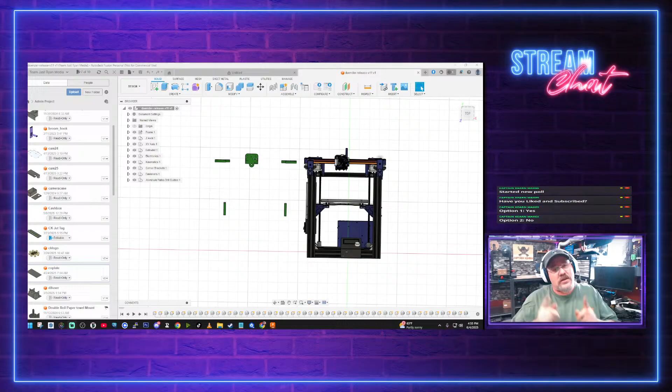Yeah. Oh, Superman does not look like Kevin Reeves.

Anyhow, let's show you guys the progress that we've made so far. I got to do this manually. I need 3030 extrusions. I need everything, bro.

Ta-da! Yeah, we have a new camera, not new camera, we have rearranged the cameras. So we have a better overhead view as well as a view towards me.

Click that. Oh, are you kidding me? Back. Dismiss the poll. How you doing, Havoc?

Zenny's18, I've been doing a lot of stretching today. I don't think I need to do anymore, but I appreciate the sentiment there.

But yeah, we are back with this beauty right here, the Ender Duo. This is made out of 2 Ender 3s. Actually, yeah, they're not even Ender 3 Pros. They're just Ender 3s. And we're going to be doing cleanup on it a little bit later because it's gotten awfully dusty.

But tonight we're going to be working on the Z-axis as well as the Y-axis and the X-axis. Now, there was something that I noticed with this.

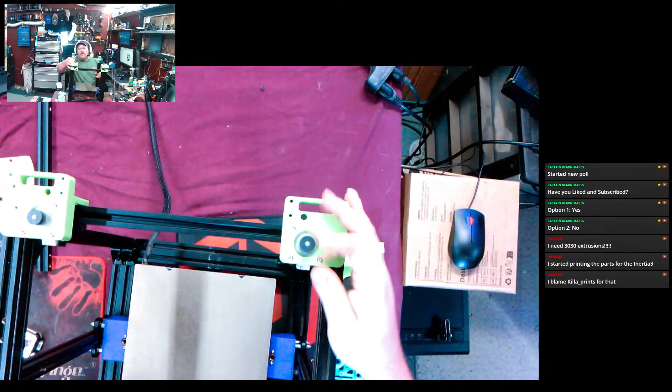You blame Killa for that? I blame Killa for everything anymore. The guy's got more money than sense. No, just kidding. He's a great guy.

He's a great guy. But so we have these 2 top motors on here. I went ahead and put these on the other day. And then I went ahead and put the rails in. I have not leveled a thing. Nothing is square on this thing yet.

So we're going to be doing all of that after it's put together. That is what I have been told to do, to save it till last. And I'm like, okay, because parts need to come on and off of this to make sure everything is kosher.

So what we're going to do is we're going to flip this puppy on its backside and shove the motor right up through the bung.

You know, especially the way Killa does things, everything tends to get expensive. But I noticed something on this particular piece the other day, and I will show you guys what I mean. So we're going to leave that right about there, and we're going to put this one in as well.

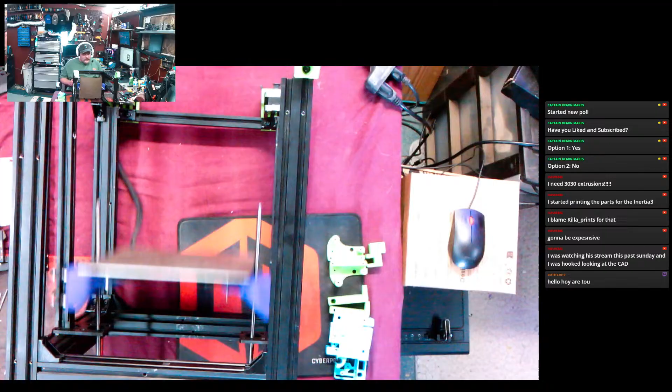All right, so I noticed something, and I didn't catch this in the initial setup of everything. Tip this back up top. You guys notice anything? Notice where the Z-axis is. I know, I got hooked on the inertia too, but I can't do it, I don't have that kind of money right now. But tell me what you guys see. Mind you, the Ender is normally a 220 build plate. Normally a 220 build. What can you guys guess from this particular setup?

I'm just waiting to see if anybody catches it because this is absolutely nutty. Havoc, you got a clue? You know what I'm talking about? All right, I'm going to set this right here where it's going to be, for the most part. Now tell me if you see what I see.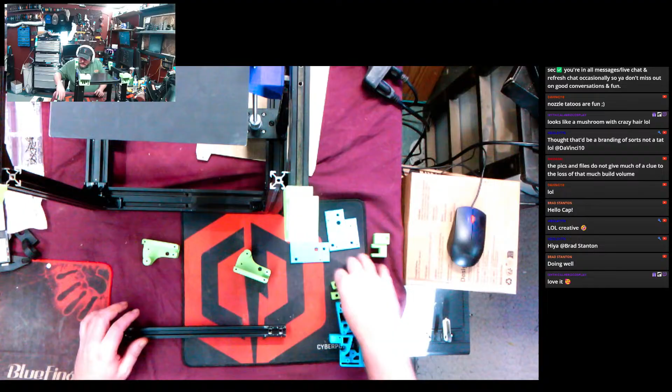All that stuff, it is what it is. But back to the project here. So let's move this guy out of the way for a moment. All right, so we're talking about the actual movement system on this now, because that's where we're sitting. Believe it or not, people, there's not a lot to building these printers. I've been trying to space it out. The longest part is going to be the electronics for the most part, wiring, getting all that set up.

So let's go to this screen, and let's go look at the top. And you guys notice these are all drill guides right here, and I already have that. These are things that you can use. These are drill guides for if you actually don't print the parts, you make it out of aluminum, which I do want to do. I just don't have a CNC to do it. I do know a couple of creators that do.

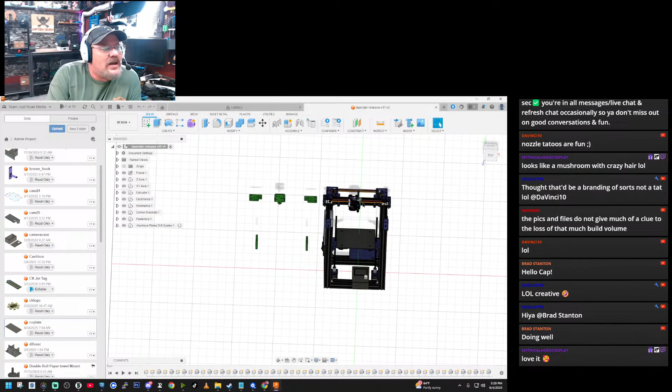Okay, so we're going to have to create spacers because I don't have any of these.

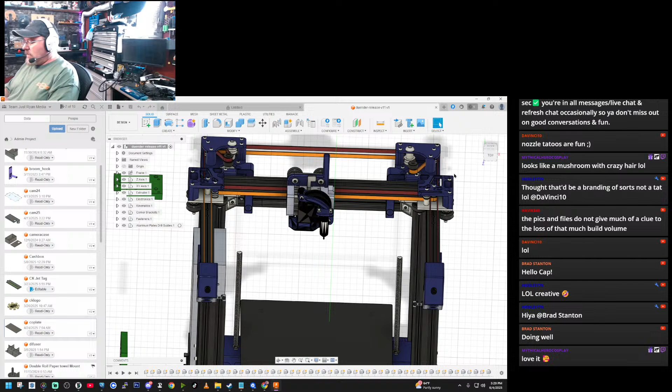But if we go into the back here, the kinematic system, whatever you want to call it, these sit - let's see, oh, they're on the outside? Yeah, on the outside, these sit like this. And you guys can't see that in the camera whatsoever because I don't have that camera up. So let's move it up here again. All right, so these pieces sit right up here, just like that, for the belt guards and so forth.

Okay, and the pulleys and the bushings and yada yada yada. Oh, that's interesting. So one of these, I do need to either smash down or just take off, which I have a brand new set. Oh well, you can't even see those because of camera. No, no, no, we got a brand new set of pulleys, so I am not concerned about that.

So we need to use 4 more guide wheels on these plates. No, 3 more. 3 more? Yeah, 3 more. Two on the outside, one on the inside, right? I'm pretty sure that's how it works. Yep. And the adjustables are on the inside.

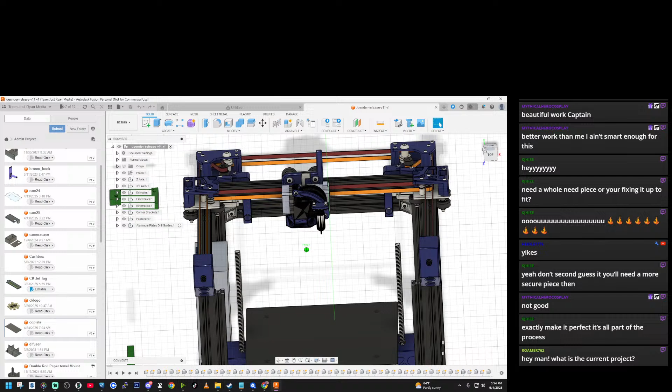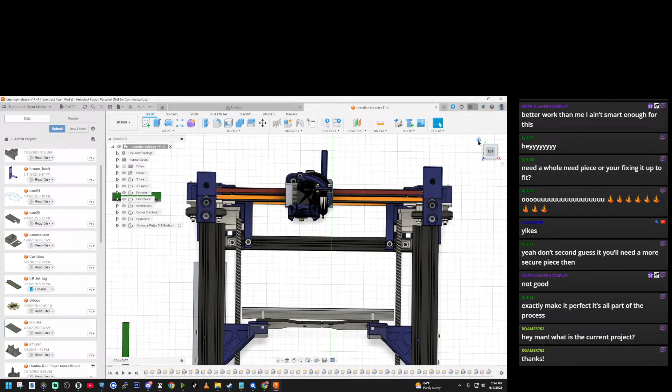So we are building this particular printer, the Do Ender project. It is a project made out of two Ender 3s to recycle and reuse as much of the machines as possible. Now my buddy Havoc over there, he says, well, you should have just built an Ender NG. He's probably right. However, this is for funsies. So we're going to build one and see what we can get out of it.

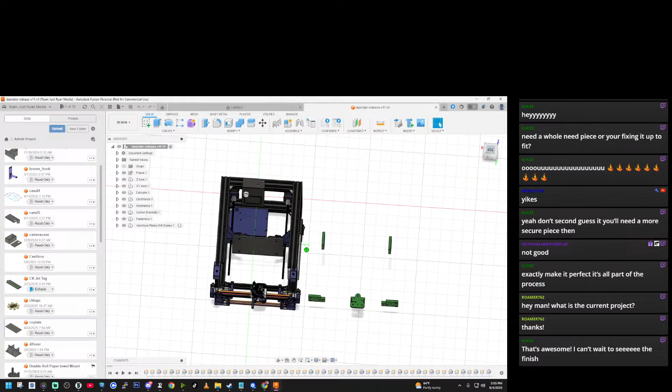So this is, you know, this is the full project here. I've already made some alterations, so it's not quite the same as you would think of it. But yeah, there's a purpose why the inventor of this project actually created drill guides, because he says this piece right here...

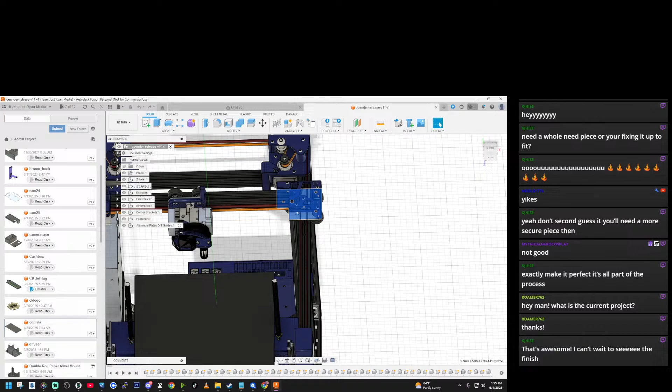Let's see, yeah, this piece right here and the back plane for the extruder, back there where the wheels are on. Anything with wheels on it, basically, and that, they all need to be aluminum. Now even he says that on the sides here, this plate that is behind the Z-axis should be aluminum as well.

But we're going to redesign this altogether, because if you guys look at the existing project, what we've got going on here, let's move this over a bit so you guys can judge for yourselves how much. You see where the lead screws are for the Z-axis, right here and right here.

If you put a hot end on that, stack it up here, how much build space do I lose because you can't hit those lead screws? Your build size stops at those lead screws. So I lose 15 to 20 on this side and 15 to 20 on this side. So I lose, just say 40 to 50 millimeters off of a bed size that's 220, or it's 235, 220 actually printable. So that brings it down to a 180. Now this is a 120 plate, I don't have a 180 plate, but you guys get what I'm saying, right? You kind of get gypped.

No, I did not. Here, I'll show you what a maker coin is, in case you don't know. We'll do Zany Maker Zach's coin. That is a maker coin. We give these out to each other and to people at events such as Rocky Mountain RepRap Festival, and they're multicolored, multi-dimensional. You know, they have a QR code on the back or a tag in it, an RF tag to where you can read company information, what have you.

I'll be honest, that is the most complex thing I have ever had to design and print because they're a pain in the butt. And I've printed a 3.5 foot starship, and I think that the maker coins are actually harder to print.

There are a number of printing projects that I have coming up, but I haven't got to those just yet. There's a lot of things that I want to do, but in order to do that, I want to do some of these things first.

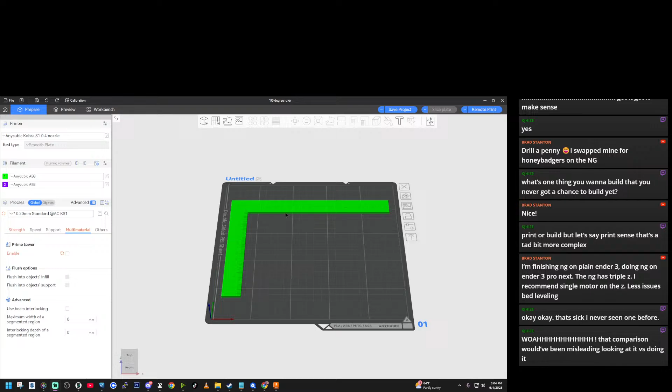Comparison would have been misleading. Look at it versus doing it. So here, let me show you. Let's go to this screen here. This is a ruler that I quickly designed, a 90-degree metric ruler, earlier today.

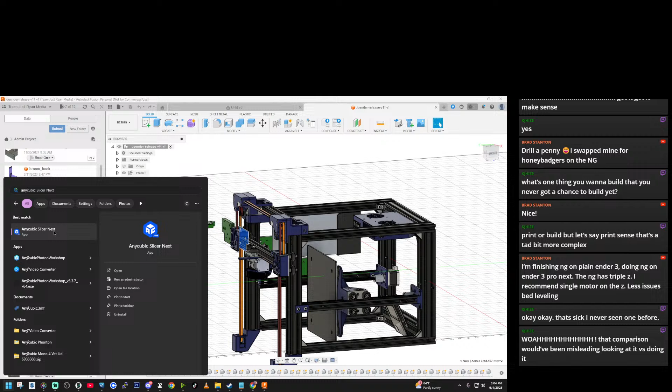Oh no, okay, so that doesn't want to work properly. Let's just discard the changes for that and reopen the software, I suppose. For some reason the software is taking forever to load, and I don't know why. I just don't understand it.

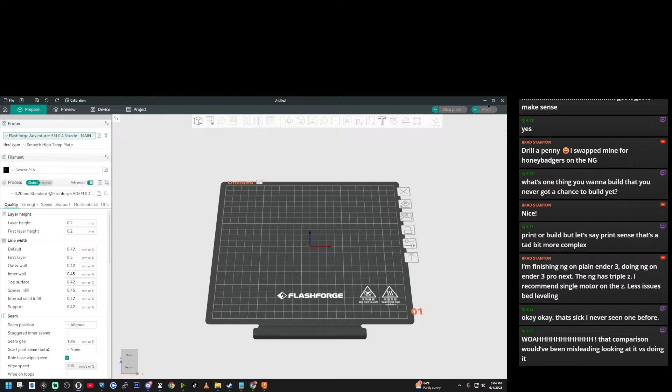This is regular Orca Slicer, and I don't have it set up for the Anycubic Kobra yet, so that won't work to show you guys the coin. But...

Oh yes, this is absolutely Legos. I mean, you know, this is my wheelhouse sitting in here inside of Fusion 360. Well, I'm trying to get the slicing software up, so we can just sit here and chat for a minute. But I love designing things.

This is a very small amount of projects that remain unfinished. I've got a personal license, so it only allows you to save 10 things in here. Well, here, let's bring this up. This is part of the maker coin.

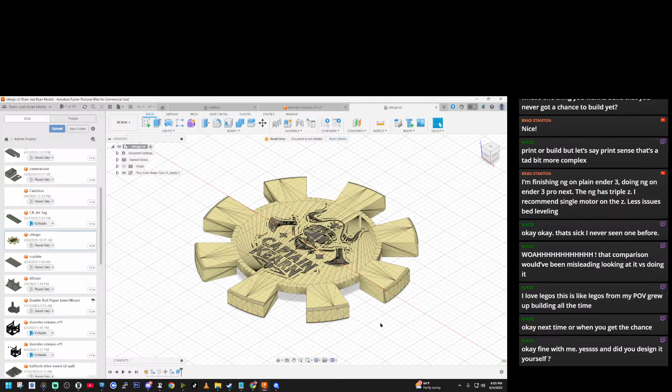Yeah, this is the first iteration that used my old logo, the Viking logo. But sadly, if you look, the text doesn't come through very well because there's no differentiation of the parts and pieces missing out of the P and the A and the R, and there's no eyes in the skulls.

File, recent. Okay, here we go. We can do recent. There we go. Still love the Viking logo. So do I. So do I.

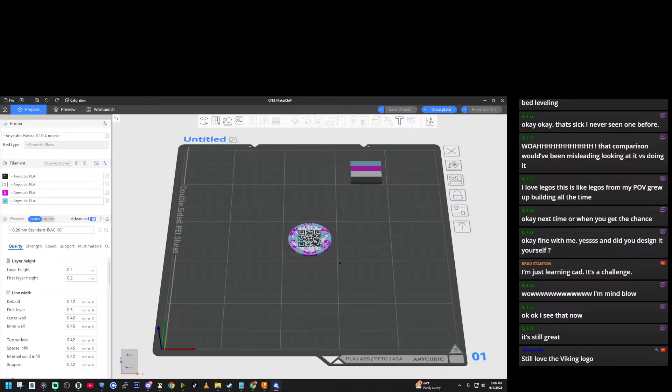So I'm going to print. Before Rocky Mountain RepRap next year, I need to print at least 1,000 of these coins. So this is how complex these little butt heads are.

Hey, come on, turn it right. Oh my lord. There we go, oh there we go. So that is one side of the coin there.

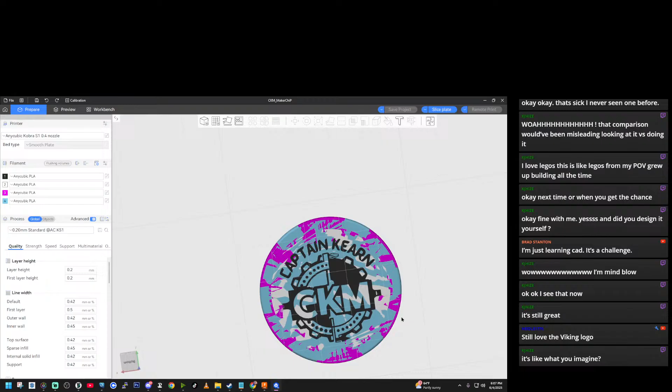I used 4 colors. There we go. When you slice it, you don't get a proper preview. Here, let's just slice the whole plate. There we go.

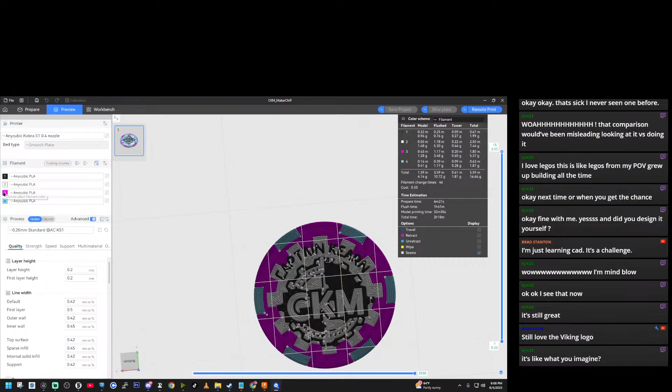So that's technically what it looks like there, except for the coloring is... oh wait, that's black. This is this color. Yeah, there we go. And then obviously there's the QR code on the back that's in black.

Is it like what I imagined? Heck yeah. I love my Viking logo. That's why I kept it over on the Twitch channel.

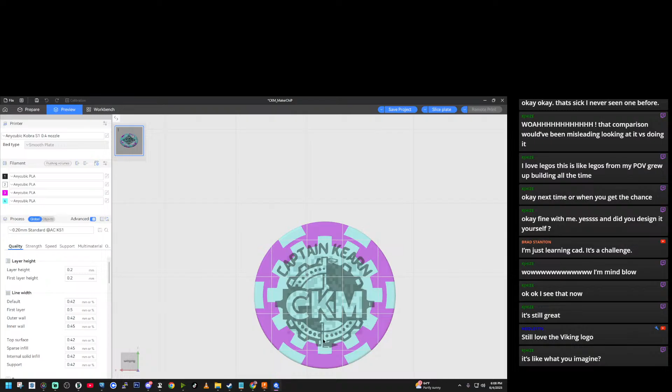But yeah, these are just like business cards, they're just like business cards. It's a pain in the butt. And I designed like 5 different iterations of this over the last year and just could not get one that I really wanted until the final iteration.

And I don't know what I did with the little booger. I honestly don't know. This is what happens when your desk is an absolute disaster. You tend to just misplace things.

The stupid part was I had it in my hands earlier today. I honestly did, chat. I had it in my hands. And you would think that something that is that color would be really hard to lose. Apparently not.

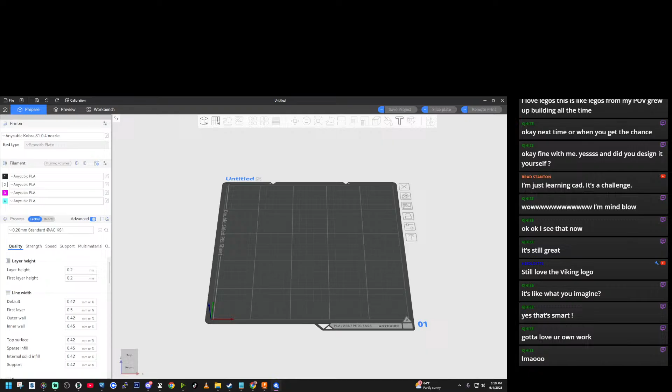Oh, but so there's some other projects. I want to do some more of my starships. You guys, let's see. Let's see if I can. Let's go to the work cam. Let's see if I can show you guys.

I've only got a few of them mounted currently. Let's see, turn this. Can you get a turn? You get a turn? Or you got a turn? There we go.

Can you see them? Yeah, you can barely see them. So we've got a miniature of Voyager here, a Klingon cruiser here, and an X-wing right here. I've got a lot more that I need to put up on the ceiling, I just haven't had the chance to yet.

So here, while I've got this moved over, there's a couple of the printers there. There's the Anycubic Kobra S1, my FlashForge 5M, and the Ender 3 Max Neo. And then over here we've got my resin machine. Down below I've got another Ender. Below this desk I actually have another Ender 3 Max Neo.

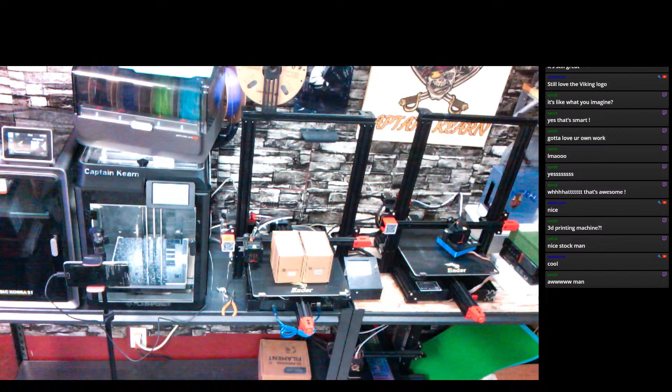Yeah, there's two of them, 300 by 300s, big ones. From left to right for you guys, it's going to be the Anycubic Kobra S1, which is a 250 millimeter by 250 millimeter build size, and then the FlashForge, which is a 220 - it's actually 235, but 220 printable - and then two 300 millimeter by 300 millimeter, 340 printable Ender 3 Max Neos.

And then, of course, we had two others that are now one printer that we're working on the desk right here. I've been reaching out to companies on a frequent basis to see if they will send me stuff to review for you guys, to see if I can help sell some product or just get some demo units in to see what's going on in the world, because this technology changes frequently. But there is another project that we might use that other Ender 3 on the bottom for.

Do you guys want to see what it is?

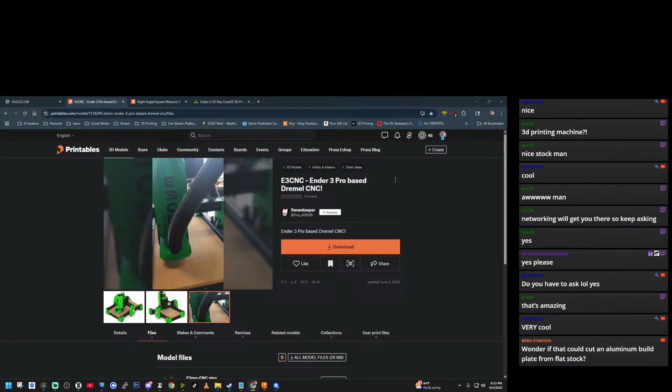If it, well, you know what, that's kind of what I'm thinking, Brad. But it's not very big. I mean, if you look at the size on it, it's not as big as you would think.

Well, see, that's what I'm saying, Havoc. I would love a CNC, and I'm like, okay, this thing - look at it, it's just the right size. And I can already see mods in my head right now of redesigning this, of things that I would do, because I'll guarantee he doesn't have a speed control for the actual Dremel. Money to be made on build plates, absolutely.

Speaking of build plates, I got to show you guys something. I have to send this back because they sent me the wrong damn thing. So the entire craze now.

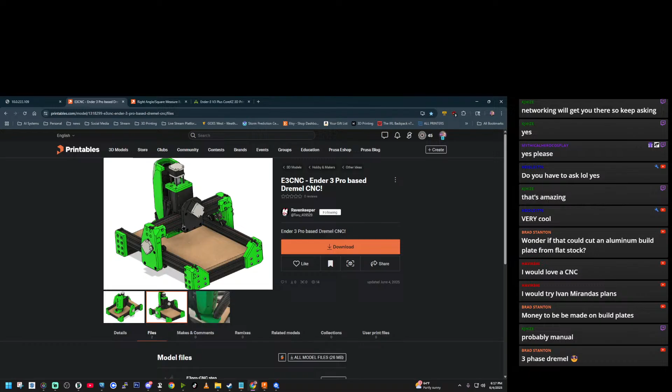Yep, this is the right one. Let's move back to the work cam real quick and bring it back down. So the entire craze right now is these hologram build plates, right? So I ordered one for the Anycubic Kobra S1. It said for the Anycubic Kobra S1. Let me pull the factory plate off. This is the factory plate, which is far too big.

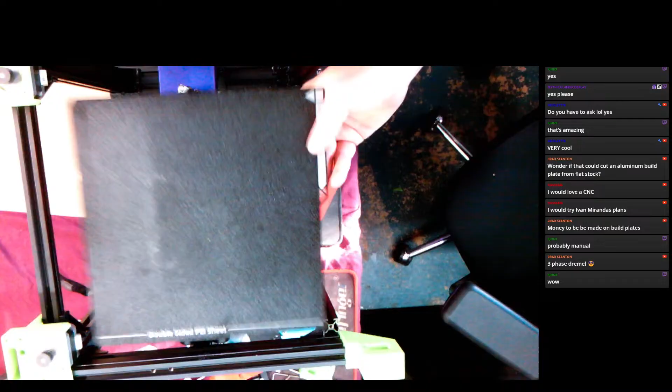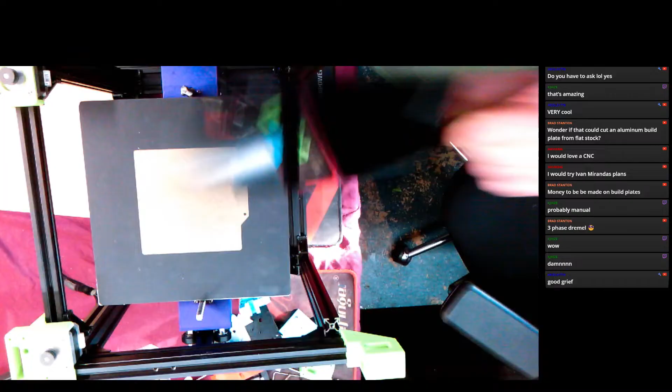Okay, this is the plate that they sent me. It's 10 millimeters too small. This is a $22 plate. I wanted this plate to print my maker chips on because it leaves a beautiful polished surface and it leaves it holographic looking. But it doesn't even fit the Ender. I think this is for the Bambu, the P1P.

Ray Charles quality control at your service. Absolutely. So now I got to wait another week to get another one because I'm going to go ahead and order one tonight. And there we go. But yeah, I mean, come on.

But this thing, guys, what do you guys think? Should we not do another Ender or Ender NG out of the regular Ender threes and use the last Ender 3 to build that?

What I'm thinking is doing something very simple, using an RC speed control hooked up to an Arduino board. Yeah, I can definitely return it, Heidi. Definitely, I can do that.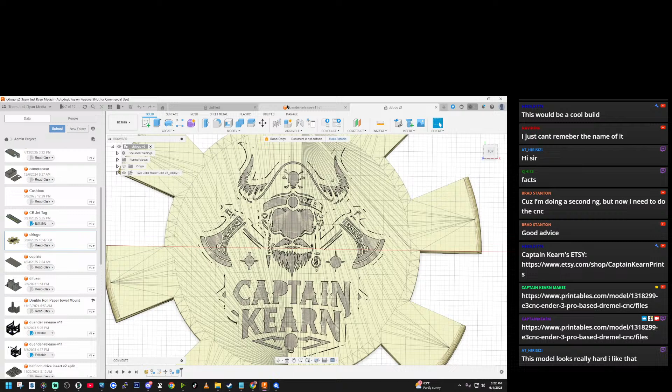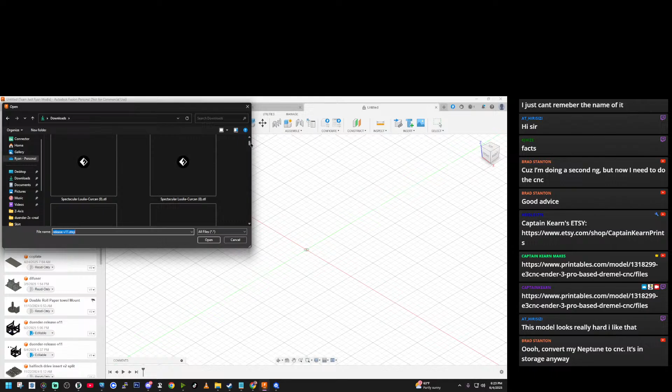I swear, honestly, sometimes this program makes me wonder who the programmer is because he obviously wasn't bright. Let's see. Oh dear Lord, oh come on. All right.

Oh my, a Neptune. Ooh, that's an interesting one, Brad. That's definitely an interesting one.

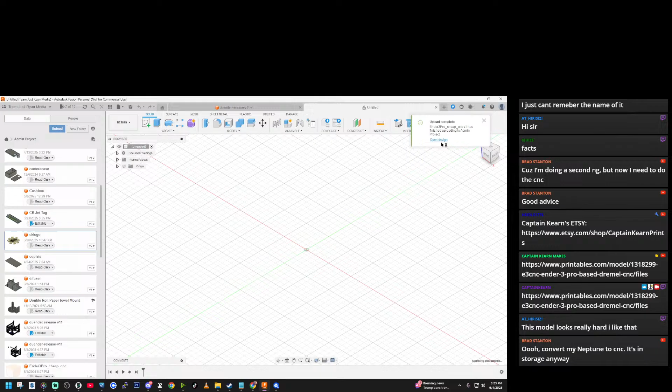Upload complete. Open design. Cannot open design. Open design. Oh, for frick's sake, come on. I really need to learn FreeCAD, y'all, because holy cow, this is driving me bonkers. I am seriously ready to convert back to Linux only.

All these Windows programs, bleh. Preparing my experience. All right, KJ, have a wonderful time, my friend. Well, have a wonderful one. And I'll guarantee you, it says uploaded and it didn't do it. Look, it didn't upload it.

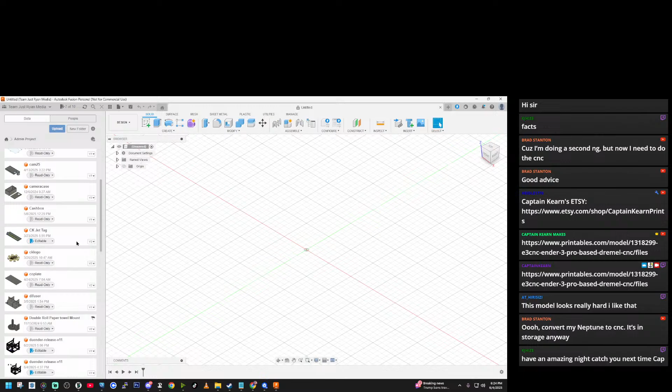You crap. Upload. Select files. Upload.

Linux rules, it does. What kind of Linux do you use? What flavor of Linux are you attached to, Brad?

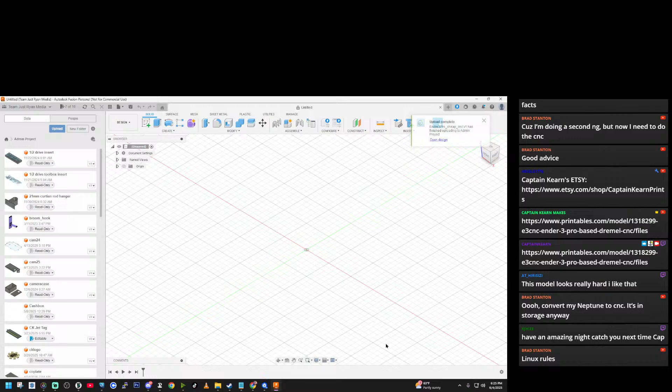It says it's uploaded, but it doesn't tell me where.

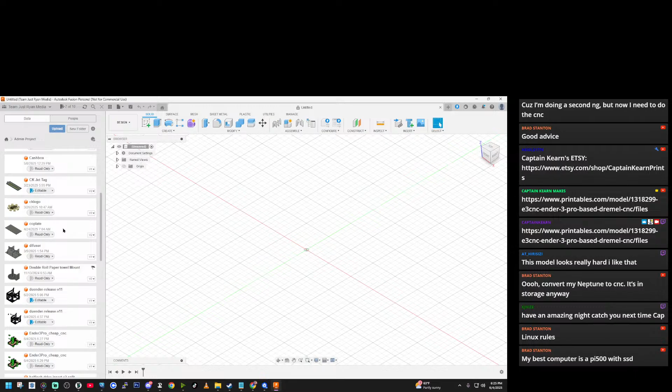Your best computer is a Pi 500 with an SSD. But which flavor of Linux do you like? Are you just, oh, there it is right there. It did upload it. Ubuntu? Ah, okay, yeah. See, I do enjoy Ubuntu. I do enjoy it. So,

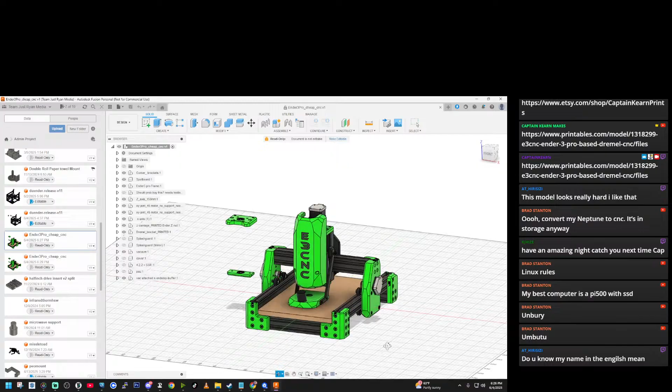To be frank, you don't need anything special, some 2040 and 4040 extrusion is all you need to build this. Everything else is printed.

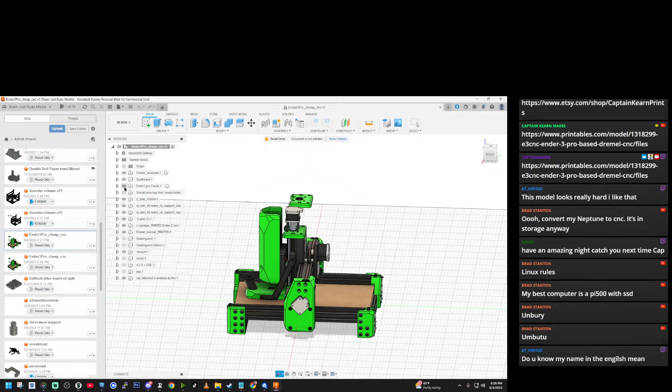So let's take a look at this. Get rid of the frame. So that is the frame of the Ender 3 right there.

No, I do not know what your name in English means. Unfortunately, I don't.

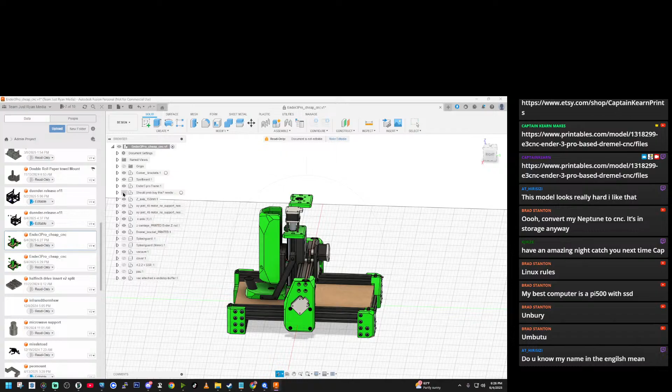You should probably buy this. What? It doesn't say, it doesn't show what it is. Huh?

You can use Elgato's software on Linux using the wine containers. I know, I've actually used it.

Oh, we got splash guards. Oh, okay, cool. There's some random cover. There's the electronics components, external power supply. Oh, don't use wavelength, God that sucks. No, there's easier ways.

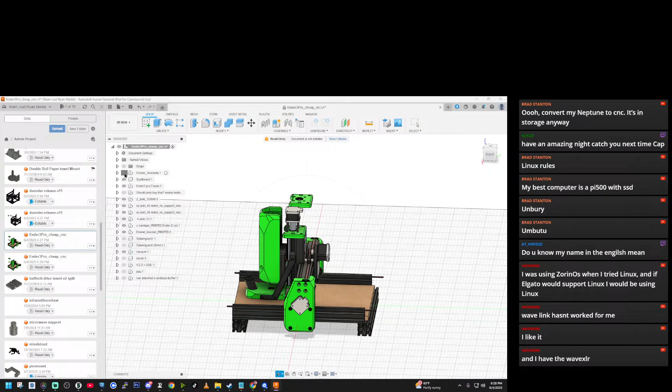Okay, vac attached x endstop buffer. That's interesting. Vacuum attachment, which I mean, obviously you'd want because it just needs... it's just a needs. Spill board. All right, corner brackets. This is such a simple design, y'all. Oh, the Wave XLR, yep, okay, yep. This is so simple.

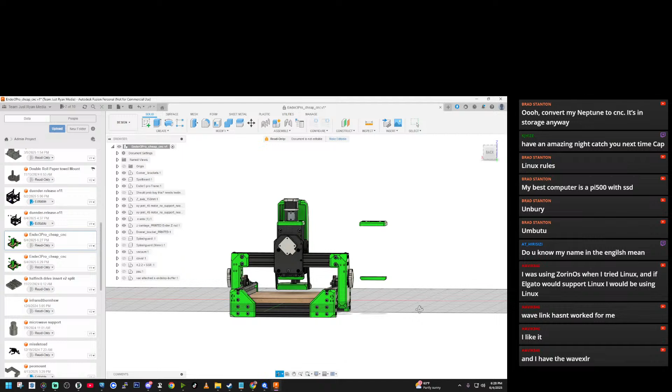But I would make two changes, well, three changes altogether. Linear rail right here on the top, linear rail on each side, get rid of the stupid belts. Get rid of the belts and go direct drive with linear rails as well. That way the accuracy is extraordinarily high. But if you're going to do it on the cheap, this is the way to do it, honestly.

So the most I would see somebody having to buy for this project as it sits right here is probably some bearings and some 6 millimeter belt. Oh, see, that's an interesting one, Brad. Yeah.

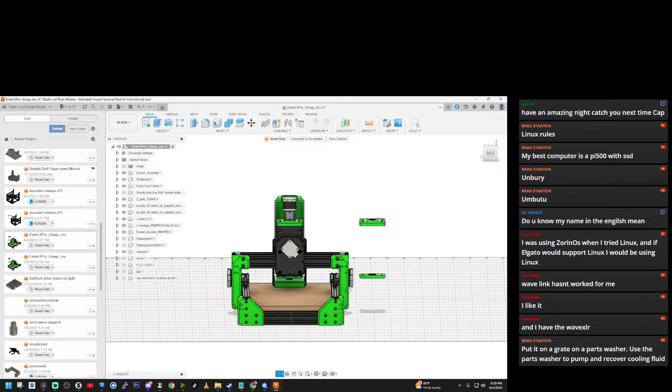There's a lot to print here, but I've got to admit, this is the simplest design I have ever seen for a converted CNC. I've never seen one this easy.

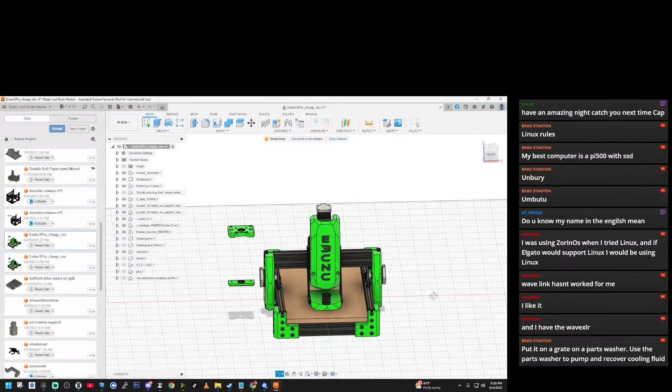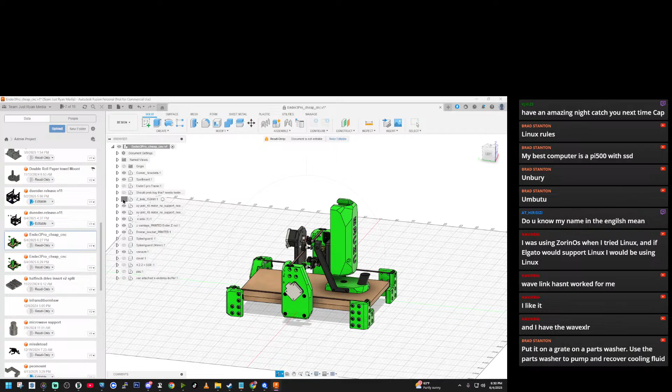Which extrusion is that? Or is he using two pieces of 2020 there? So he is, you do have to buy two linear rails. Look at that. And he's using the Z screw, a shortened Z screw on that. Okay, that makes a lot of sense. So you're looking at about 40 bucks.

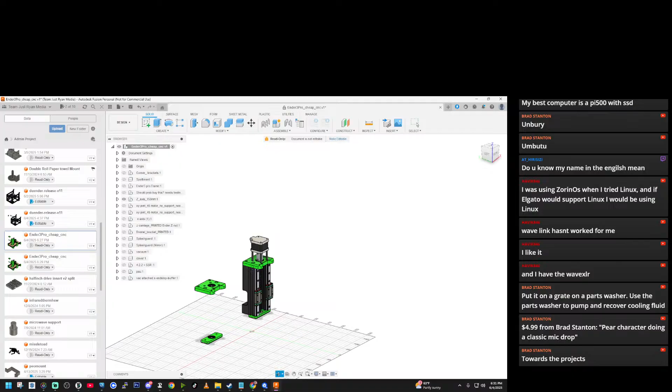So this is 3D printed, and it's two pieces of - that's got to be, yeah, that's 2020 extrusion. So that's a piece of 2020 that's cut in half. Okay, all right.

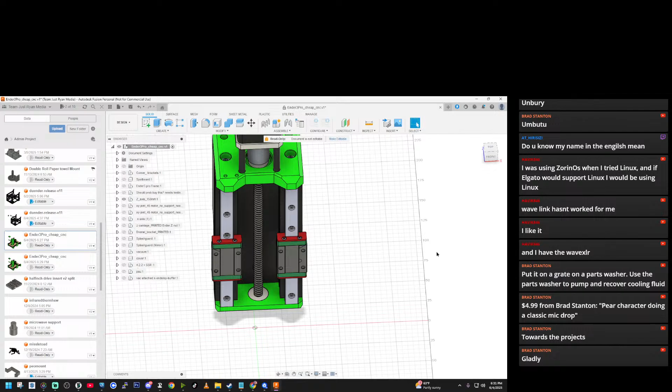So this is not a hard project, guys. I mean, the only thing you're going to need is a good grinder to cut these, with a cutoff wheel on it.

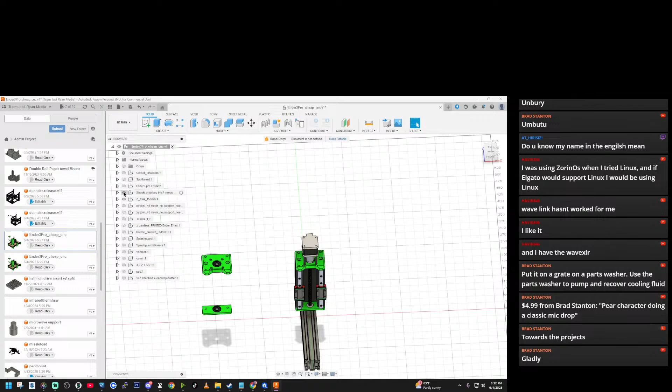You should probably buy this, why buy another piece of 4040 extrusion? Oh, he doesn't have it. Okay, so he's using the 4040 as a stabilizer for the center. That makes sense.

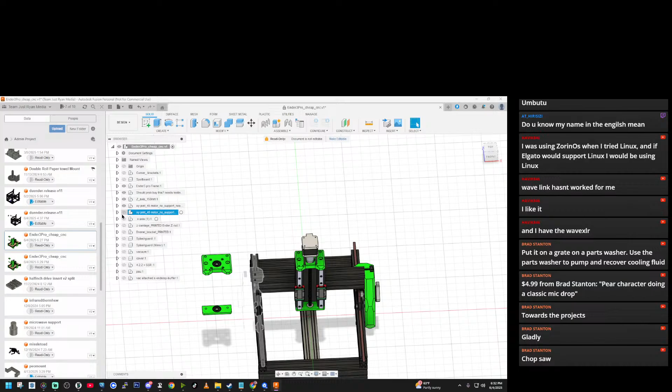God, this is such an easy project. There's not much to this. I mean, there's a lot of nuts and bolts. God dang, there's a lot of nuts and bolts.

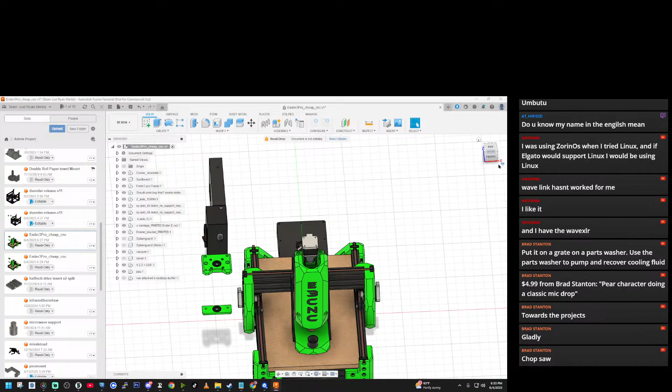But other than that, y'all, you'd have a fully functioning CNC chop saw. There you go, you can use a chop saw too.

Yeah, it does come with using extrusions - cut off saw, or a chop saw, cut off blades, all sorts of stuff. I have a blade for my Skilsaw that will cut through aluminum. Actually, I've cut through quarter-inch steel, but my saw won't cut through quarter-inch steel well. It won't cut through steel hardly at all, but it'll cut through aluminum like it's butter. Whenever I need to use that, I just mount it upside down on a table that I built, and it acts like a table saw.

So this is definitely going to get put on the list of things to do, guys. Even if I have to... next Twitch paycheck.

I think I'm going to purchase another Ender 3 Max Neo, and we'll build this out of that so we can have a much bigger build surface.

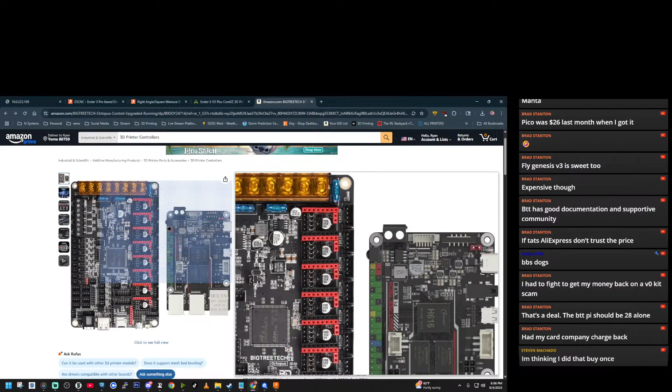Anyway, I got some thinking to do on that, but yep, this is going to be one of the projects coming up pretty soon. Steven, what are you doing? How you doing, my friend?

I'm not on camera because I kind of hurt myself - I had to get down and pick up a part off the floor and hurt my back pretty bad. But we kind of ran into a stopping point with the DUENDER build. Am I going to MRRF? Heck no, I can't go to MRRF, it's too far away from me. Unless somebody wants to sponsor that puppy - I mean, I can pay for my lodging, but I can't pay for the flight.

Of course, I happen to know like 30 of you out there that live very close to it, so I'd probably get free lodging if I really wanted to.

But yeah, Steven, we came up with an issue. I was going to say you have like 3 octopus sitting on the shelf. Oh my gosh, dude.

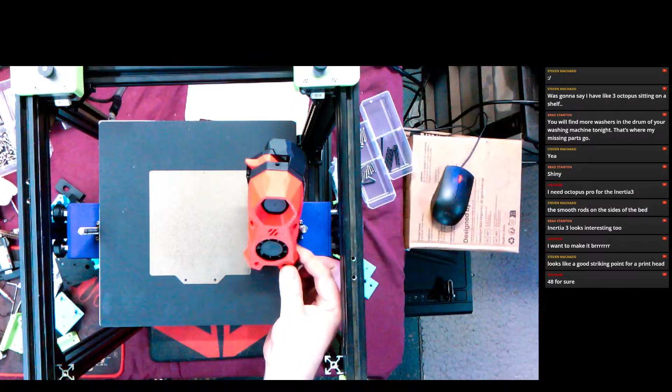So at most, I'm losing 20 millimeters on each side, maybe 15 or possibly 12 or so. I'll have to do the proper measurements. But that also means I lose about 40 millimeters of build size out of a 220. That means it'll be a 180 build structure.

So we're going to take the z-axis, and I'm actually going to move it over closer to the rail here, reprint this and reprint the mount altogether. And I'll end up having to cut the rods because I'm going to be mounting the motors directly on top of the extrusion.

So yeah, rip. And those aren't smooth rod; those are threaded rod. I mean, I could be a smartass and change that out to smooth and cap it right there and make it a belt system. That would be interesting. Yep, directly attached to the motor.

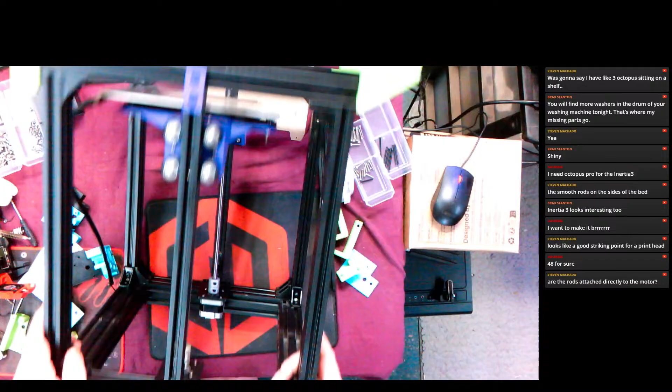Here - ow. We'll tip her to the side so you can see. Yeah, there we go.

But see, the motors are going to have to be mounted up here, or actually just off of it. So the motor mounts will have to change a little bit. They'll be half on, half off, so that the threaded rod can actually be moved over 20 millimeters, so I can maintain that build volume.

I don't even know if I'd have to reprint the bed mounts for that, to be honest. I think I could do that without doing that. Because if I simply drilled a new hole over here, 20 millimeters in, and mounted the brass nuts there, I could do that too, Brad. I could do that too.

Or I could change out the entire Z system, instead of doing that, just make that a smooth rod and put it straight over towards the edge and just run belts, like you said. What's the rod length? It's standard Ender 3. I have no idea, I've never measured it.

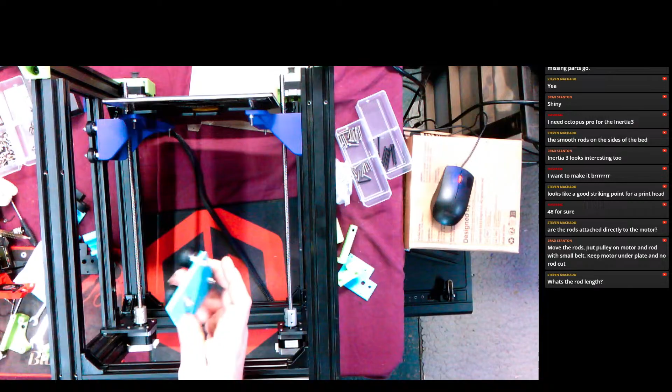But we did figure out that the XY carriage does need to be made out of metal or aluminum, steel or aluminum, because this flexes like a mofo. So I'm going to get a cutting wheel for my grinder, and I have some aluminum or metal here, and do that. Yeah, 300 on an E3, I think that's about right.

And if I cut them, I just cut them from the base, not from the top. Nobody cares what it looks like on the motor side.

Or, here's an idea. What if we took - oh, no, that wouldn't work.

You'd like to find a frame like this? Just two Ender 3s put together, my friend. That's all it is, two Ender 3s put together. It's called the DUENDER project.

Oh, you're all right, Brad. Don't worry about it, I'm good. I have a lot of excess stuff laying around here, so not a problem. I appreciate it though. But Steven,

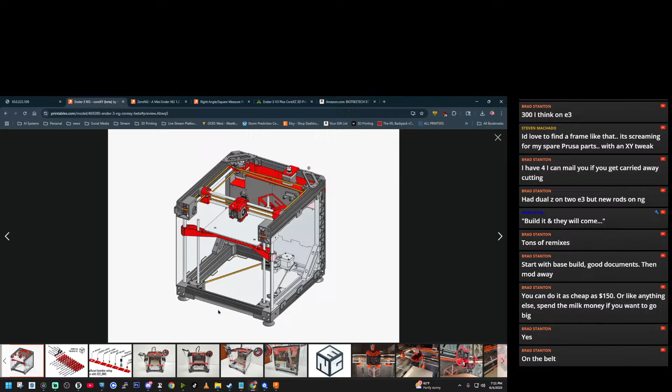Huh, I'm going to download the step file for this puppy. And hopefully the step file is actually in this monstrosity of documents.

Well, I like the fact that it's already got - because that's what I plan on using, this dragon hot end. Dragon burner, baby.

And make sure I download the manual as well. I mean, yeah, so the whole point of these projects is you can always come back to it and go, oh I want to change that, oh I want to change that. As long as you have one other working printer, you can change it all day long.

I forgot to follow this guy, and I forgot to put this in fun things. Yeah, that's what I was saying, is the step file should be here somewhere. And look at this - there's 71 remixes, y'all. 71. Somebody even made one out of a CR10.

Talk about unstable, holy crap. Oh well, yeah, the 1.2. There we go. Here, add that - that's what it actually looks like.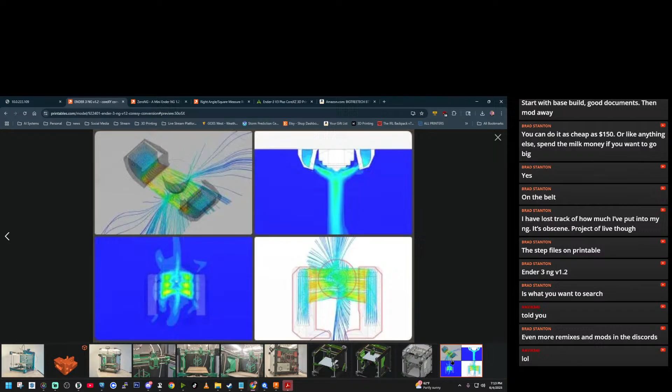I just don't like the fact that there's so much to buy for this thing, it just drives me insane. It's like, come on. I do like the fact that the enclosure is easy to make. There is an enclosure mod for the Duo, but it's not as easy.

Didn't somebody have one of these at Rocky Mountain? I think they did, I can't remember who it was. But yeah,

It's a beautiful printer, it really is. And the original designer right here, man, he knows how to do some wire organization. Look at how pretty it is. Although he does need - okay, he's got the two vent fans right there. Yeah, I know David, yeah.

Well, maybe. I don't know. We'll see. I mean, I am down for whatever. I'm willing to build whatever.

I have a love of building things and not just printing. So I can sit here and design all I want inside of Fusion and design some sick stuff, right? Then you go and print it. You print it, you're done.

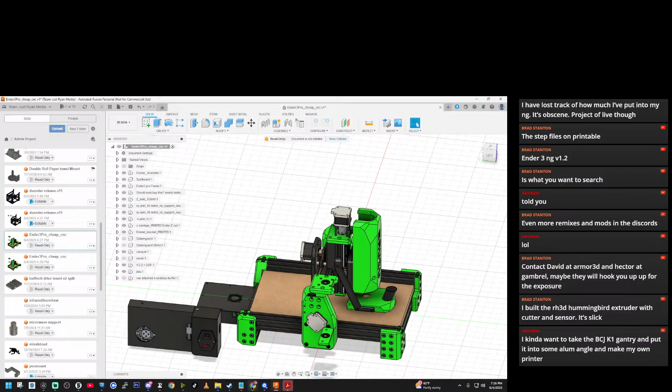I just want to keep building. I'm all for reviewing printers and stuff, but I'm more better off if I'm building stuff and reviewing stuff that people have built and designed, and I can give positive feedback because this is a great design. I can already see design flaws in it just by looking at it.

No, it doesn't rhyme with shmorbiter. No, actually, I can tell you guys, I have a Jabberwocky coming. I have a Jabberwocky kit coming.

Yes, in fact, I do. And it will actually be going on the Ender 3 Max Neo temporarily until I do something with those printers.

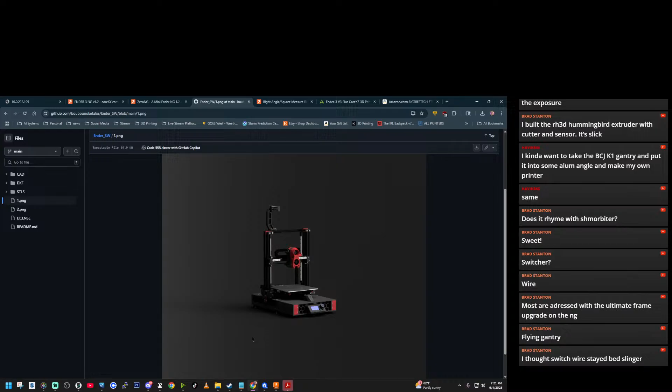That one even has a stealth burner on it. But I'll be putting... yeah, and then you can fully enclose it as well. But no, yeah, the switch wire does stay a bed slinger, but it slings on the y-axis only.

Oh, dang it. This is what happens when my brain stops functioning when it gets later in the evening. Voron switch wire gallery.

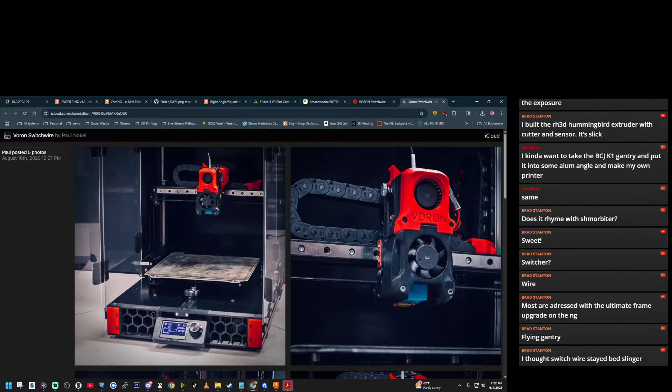Nope, the bed stays in one place. Well, it does have a linear rail there, but it doesn't look like it moves very much. But that's also one heck of a conversion.

And what was that company out there that actually ripped off the Voron switch wire and built their own and called it their own product? I can't remember who that was. The switch wire is an open source thing, and yeah, I can't remember who that was. It is, I can't remember. My brain is fried, guys.